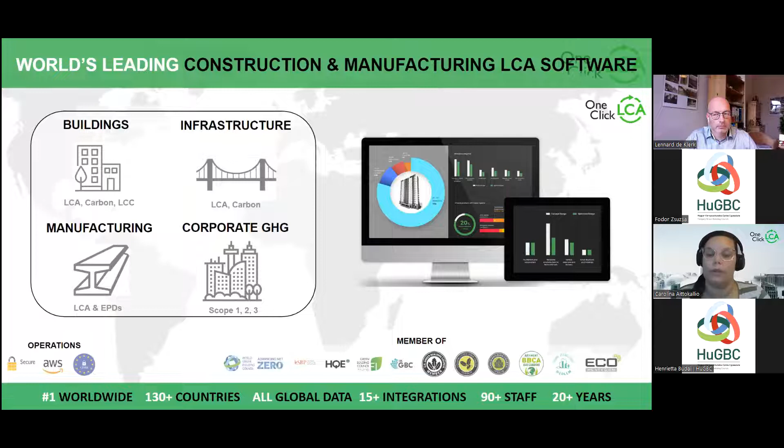We are able to connect the entire industry because we offer solutions for the entire industry. For example, manufacturers want to do the assessment on their products and issue environmental product declarations that will then be used and specified by architects and engineers, bought and used by builders, investors, and institutions in their calculations as well. In One Click LCA, we have solutions for each phase of the project, and we also need to keep in mind that the potential for decarbonization of the project halves as each stage of the project moves forward.

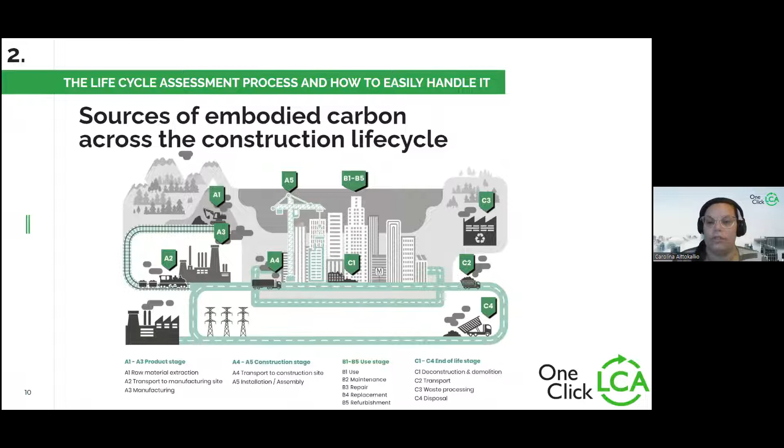However, we have some more stages that we need to take into consideration if we are going to be working with European norm standards. So, for example, in the B stage, we have the operational energy and water use, and we also have the D module that talks about benefits and loads beyond the system boundary. So in terms of life cycle assessment, this is how it is done with this breakdown of stages.

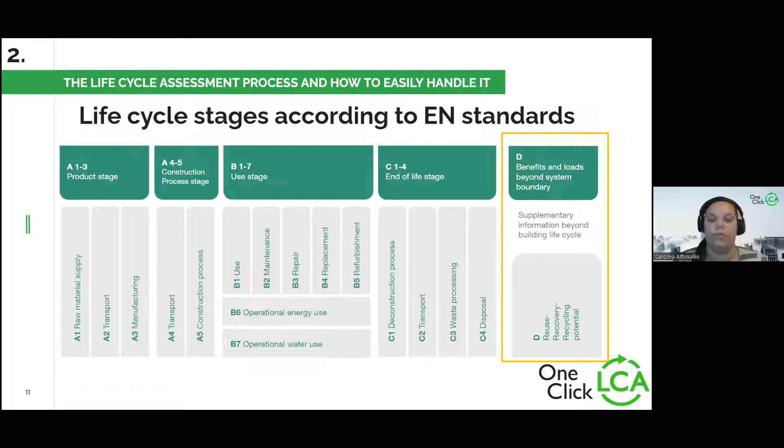And in terms of whole life carbon, the difference of whole life carbon is that it considers other impact categories beyond just carbon and biogenic carbon. So it considers also acidification, eutrophication, ozone depletion, and others.

So what is building circularity? Building circularity is a way to measure the circularity of a building and a construction of a building. There is no norm in place for building circularity at the moment, but there are principles and metrics, and some of the most well-known and used are from the UK GBC, HQE Economie Circulaire from France, the London Planning Circularity Statement, and the Ellen MacArthur Foundation Circularity Indicators, which are very much intertwined.

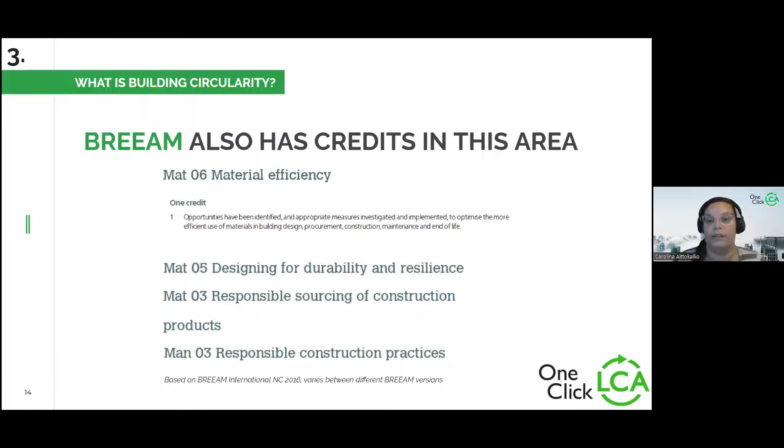So for these principles and metrics, what they consider are only the manufacturing stage and the end of life of the products of this building. Also in terms of certifications, BREEAM also considers credits for the circularity assessment. And within this consideration, we need to think about a few other elements. For example, the design in the buildings.

So is the design made for assembly, disassembly? Is it made for adaptability, flexibility, longevity? And also the reuse potential and the impact of the materials. And also if we are designing out waste, for example, using recycled materials.

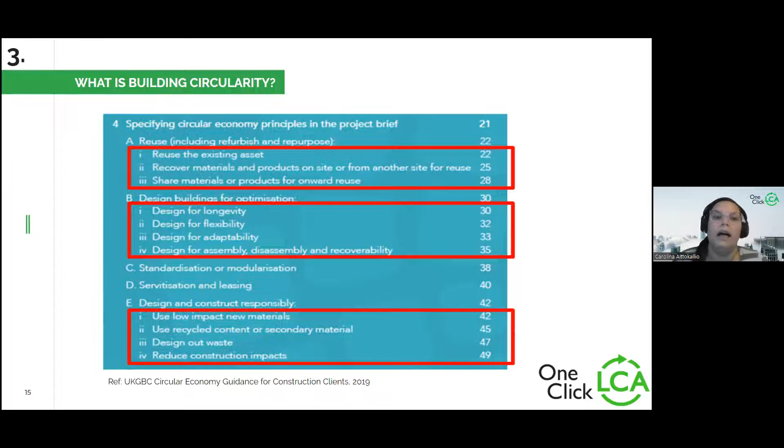And now just a quick question before we explain how the breakdown is made in terms of the impacts for building circularity. At the end of life, we have two different types of materials, the materials that are downcycled and the materials that can be used for energy. So how do you think those materials are accounted for, for circularity purposes?

Do you think materials that are downcycled and used for energy are fully accounted for, are only accounted for in 50%, or are not accounted for at all? Let's give you some time to give your opinion and vote.

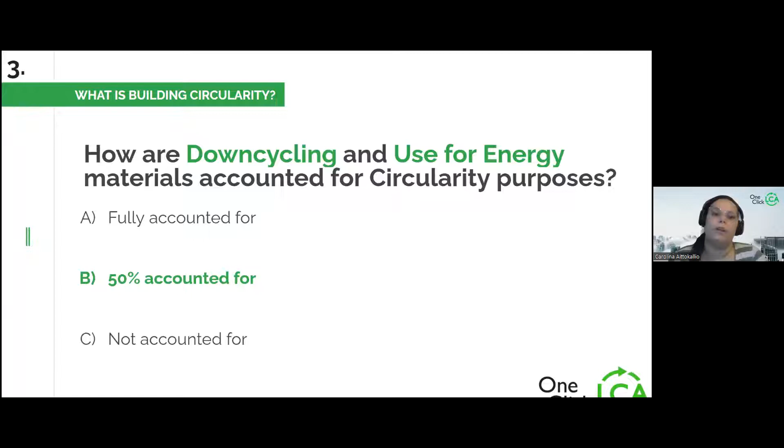Okay, so I guess we have here the majority of you, 46%, think that it's 50% accounted for. And you are correct, it is 50% accounted for. Let's have a look at how the circularity principles are used for circularity purposes. So we have here at the top of our circularity assessment, the materials recovered, in which we can find all the materials that are used in the construction of the building.

So here we have virgin materials, renewable materials, recycled materials, and reused materials. And for circularity purposes, virgin materials are not considered at all, but all the other materials are fully considered. So the sum of materials recovered here is 4.1% from the renewable, recycled, and reused materials.

At the bottom, on the other hand, we have the materials returned, which are materials that come from the deconstruction process of the building after the life cycle has happened. So here we have the use as material, which is fully accounted because it's a material that is used as the same quality, same type of material. Then we have recycled materials that are also fully accounted for.

We have downcycling and use as energy materials that are accounted for in 50%, as you guys now know. And the disposal materials that are not accounted at all. So the sum of those materials are the materials returned, and our circularity score is the calculation of the average between the materials returned and the materials recovered.

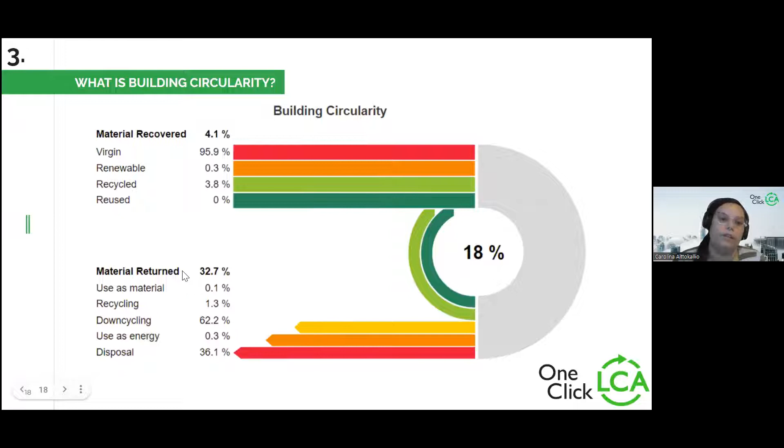So how do we apply building circularity to buildings? We have some principles that we can work with. For example, we can combine it with other life cycle assessment or life cycle costing calculations. We have to be aware of the weighting principles, which are mass-based, and the calculations are mass-based, and the weighting principles are the ones that we just discussed on the last slide. And we have to also understand the scope of the calculation that considers all the materials in the period given, including site wastage, replacements, and end of life.

And what does it cover? It covers the reduce, reuse, recycle principle, value preservation, design for adaptability, and design for disassembly practices. The users of One Click LCA that use this tool, the building circularity, what do they need to know to do this assessment? Basically, the materials and their quantities, and also refine from the default values the percentage of reused or recycled materials, the shares of waste, and also if they are made for design for disassembly and adaptability, if that's the case. The calculation percentage, once again, is 100% linear, taking into consideration the weighting principles.

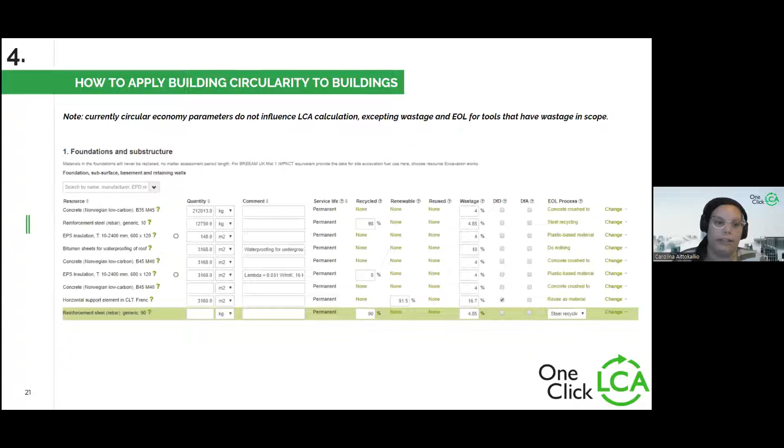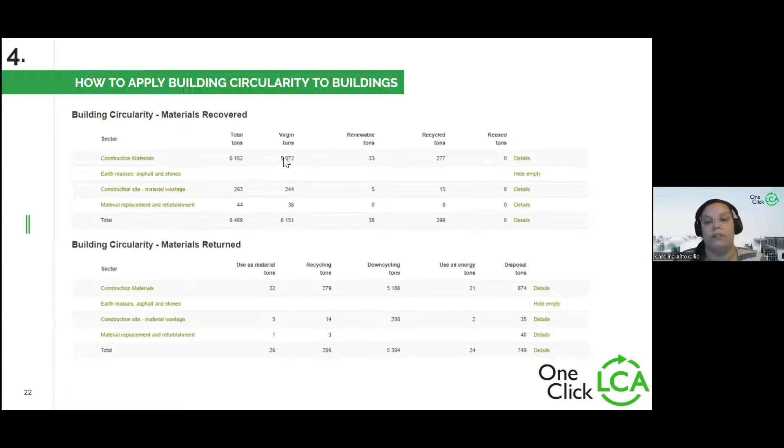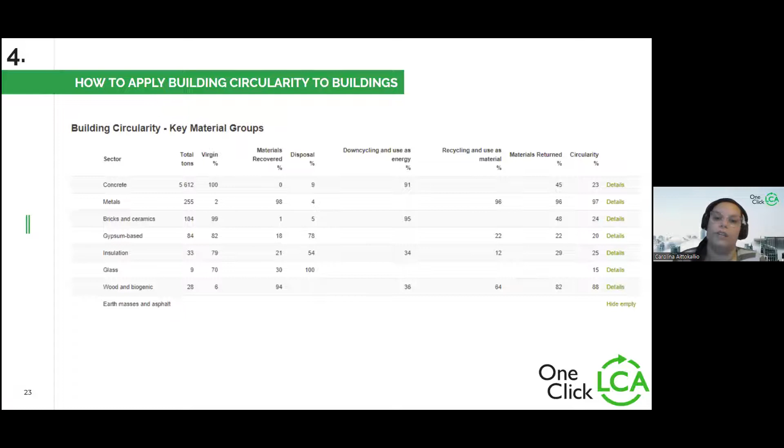Then in terms of results, we can have results for materials recovered and materials returned, not only in the graphs, but also in numeric terms. So here we see them in tons. And also we can see the key material groups, the materials that are the most responsible for the circularity score, and how so. For example, here we have concrete with a very high amount in downcycling and use for energy. And now let's have a look at how to work with building circularity with the help of One Click LCA.

So here I have a project in which we have our levels lifecycle carbon tool, and we have our building circularity tool. We have two projects, the baseline and the proposed design, and we can also compare the two projects down here. If I click on my circularity score from the building circularity, I can see the data input tabs: the building materials, the circularity weighting factors, and the calculation period. In the building materials, we will see what I just showed. So here we have the foundations and substructure.

We can input those materials either manually by typing or clicking the arrow, or we can also import from one of our more than 15 different types of integrations. Then we need to input quantities, percentage of recycled and so on. If we import from other sources, we don't have to input all of it. Usually the type of material, the name of material, quantity, and quantity type are already present in the import. We then have the circularity score and weighting factors displayed here, as we mentioned before. This can also be altered if you're working with different principles for circularity. And we have the calculation period, which here is 60 years for this project.

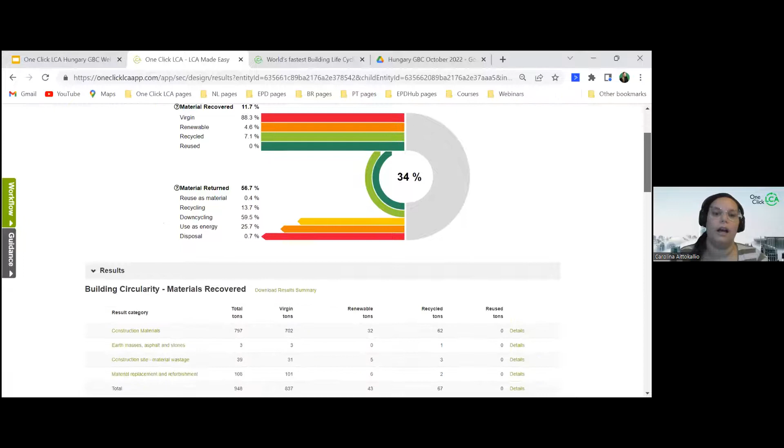Then we can have a look at the results. In the results, we have our graph that we just had a look at. We also have the results that we saw earlier. And we have here a list of materials that I have selected for design for disassembly and adaptability practices. We also have different types of graphs that can illustrate these results: our basic graphs here, and then our advanced graphs, so bubble, Sankey diagram, tree map, life cycle stages, and so on. Let's go back to our presentation.

And what other tools can we use with building circularity? We can use the levels tool, which is the one I used for the project I just showed. We can use Carbon Designer 3D, which is an early stage tool, the lifecycle costing tool, LCC, also BREEAM, as I mentioned before, and also our net zero carbon tool can be used in connection with the building circularity tool.

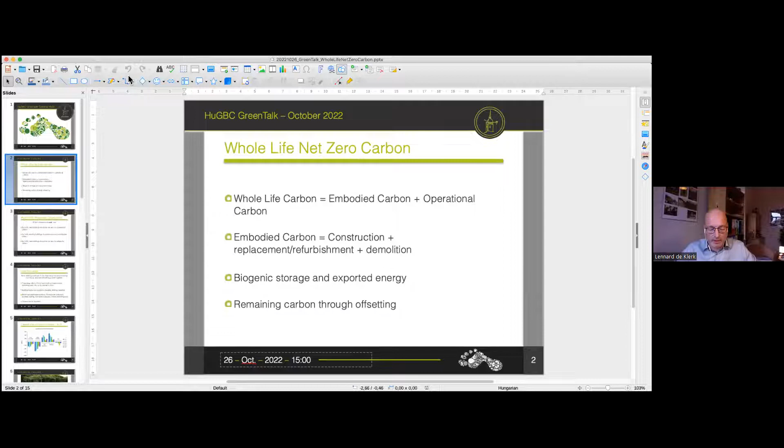And yes, indeed, what I would like to do in this presentation is show you a real life example. And this is all because we are working on whole life net zero carbon. And just to remind everyone what we're talking about: we're talking about the total carbon emissions over the full life cycle, the whole lifespan of a building. So that's what we call whole life carbon. And that consists of two elements. One is embodied carbon, and embodied carbon is defined as the carbon emissions due to the construction of the building, the replacement and refurbishment during use, and at the end of the lifetime, the demolition. Whereas operational carbon is the carbon emitted for using the building as such. So you should think about heating emissions or the usage of electricity while using the building.

Other elements, and I will talk about it soon, are biogenic storage, exporting energy if you produce more electricity, for example, than you consume. And if you have any carbon emissions remaining, you might offset them through projects.

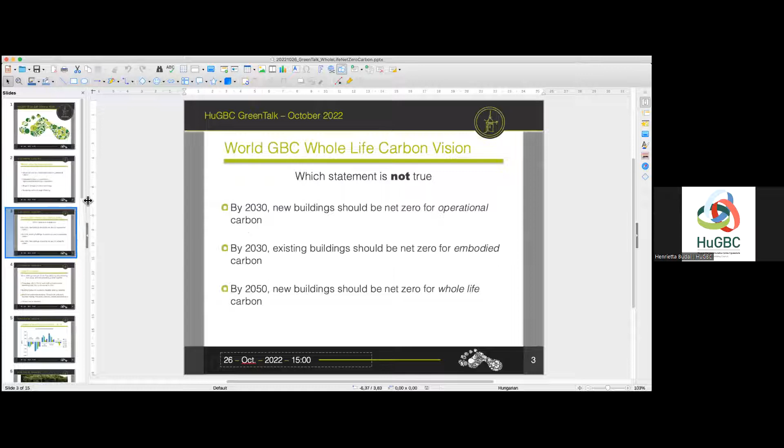The second answer got a score of 71%, and the first and the third one got 14% of the answers. Okay, that's very good, because indeed the second statement is incorrect, and I'll explain why. If you want to have net zero embodied carbon, you would always be talking about new buildings. If a building already exists, you cannot make it net zero as far as embodied carbon is concerned. So the first statement is really to encourage people to be operational net zero carbon by 2030, and then by 2050, as the whole of Europe should be net zero carbon, it also means that all the buildings should be whole life carbon net zero.

So going to the presentation, Irota Ecolodge is a small holiday resort in the north of Hungary. We are between Miskolc and Košice in the Slovak Republic. And I'm also happy that I've been told that a lot of people from the Slovak Republic have joined this GreenTalk. So be welcome.

And what we wanted to achieve when we started this project in 2015, so that's already seven years ago, was to show the hospitality industry that luxury and sustainability go well together. Whereas sustainability is often associated with a simple life, we wanted to show that both elements, luxury and sustainability, perfectly go together. It consists of three large villas, 170 square meters each, which can house six persons per villa. And it has a shared natural swimming pool, which is 6 by 16 meters. We opened in 2016. And when we designed these three villas, we wanted to be as sustainable as possible.

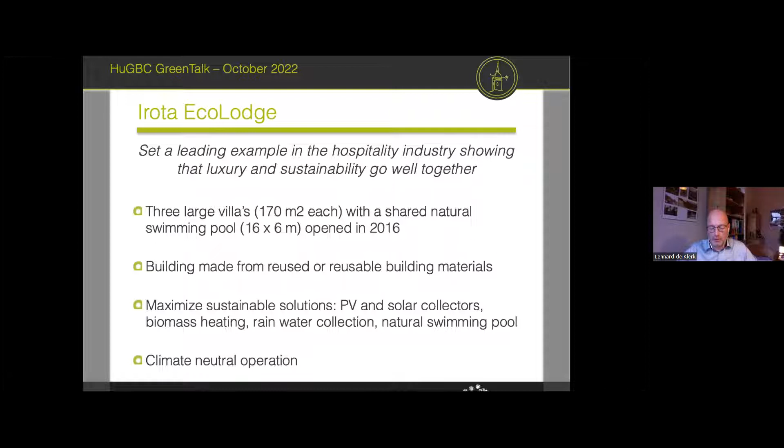The heating is with biomass, with firewood. We collect rainwater for flushing toilets. And the swimming pool itself is natural, so we're not using any chemicals here. And what we wanted to achieve is a climate neutral operation. And that's actually what you can see in here. These are our operational emissions, also better known as scope 1 and scope 2.

And here it's important to realize this is not only the building, the holiday resort itself, but it includes the full operation of our business. So you see first Irota EcoLodge itself, but we also have a utility building where we're doing the laundry. We're renting out an apartment in Budapest as well, the Budapest City apartment. And on the 4th, transport, these are our company cars that are using fossil fuel. And as of recently, we also have an electric car.

Anyway, if you look at the net emissions, they're below 0. So here we can claim that we are a carbon neutral operating holiday resort. But actually what we did want to have a look at is what have been our embodied emissions when we built Irota EcoLodge. And if we look at the whole life cycle, are we still net zero as well?

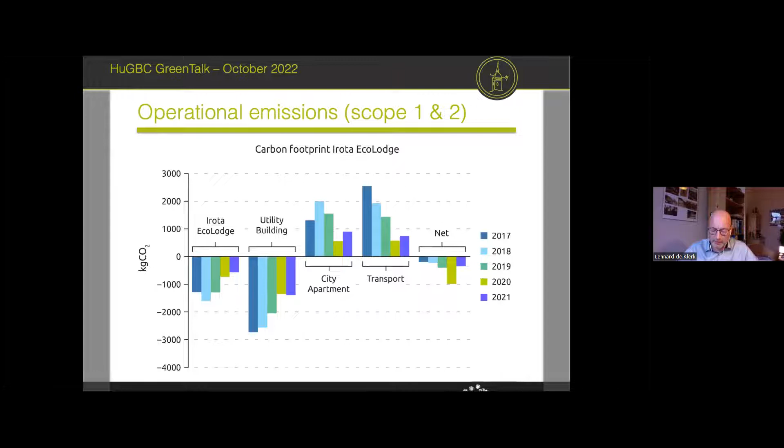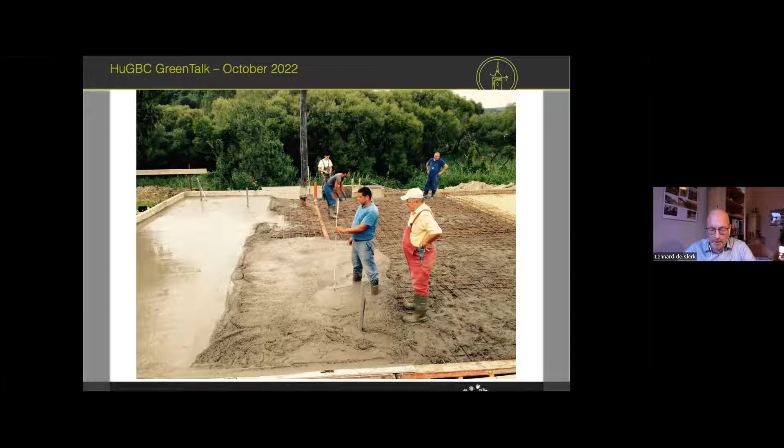But what we built on top of the foundation is different. And here you can see the reused or reusable building materials. On the left side, you see the timber frame construction, and wood is a perfectly reusable building material that at the end of the life cycle you can disassemble and use the wooden beams for other buildings. On the right side, you see cellulose, which is a building material made from newspapers, impregnated with a fire retarding agent. And with this cellulose, we insulated the floor, the roof, and also all of the walls.

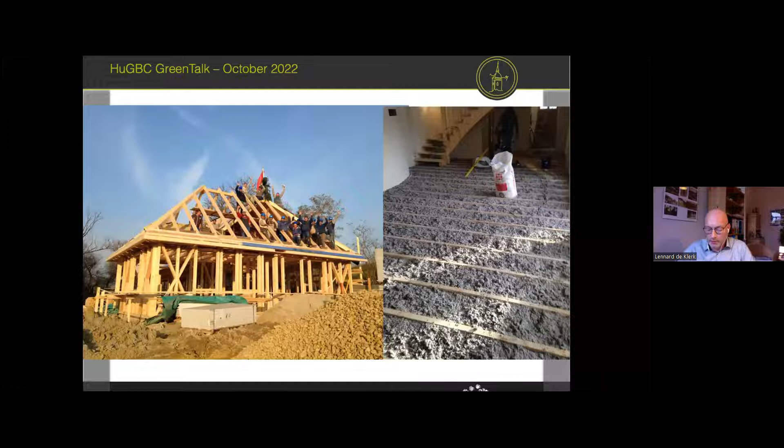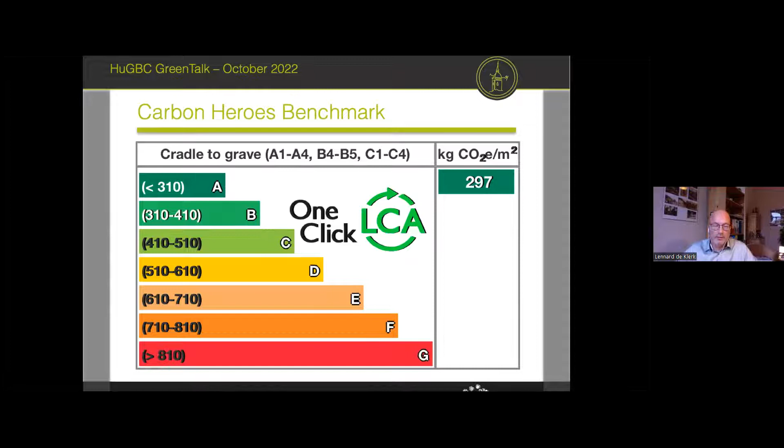And here you can see the result. The embodied carbon of this building is almost 300 kilos of CO2 equivalent per square meter. And if you benchmark that against average buildings in Central and Eastern Europe, you can see that we are in the A category. And that's not so much because of the foundation, because that's fairly standard, but because what we built on top of the foundation is relatively low carbon.

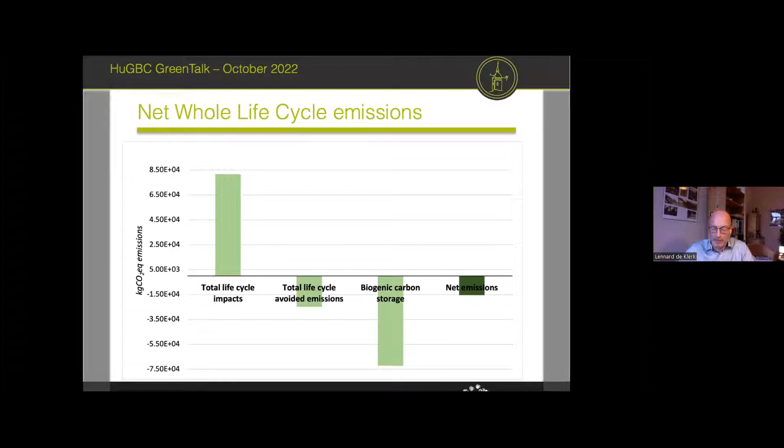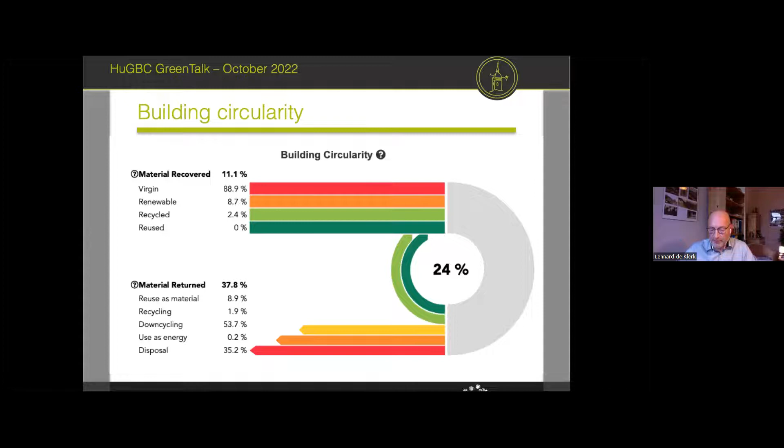And also, if you look to the materials returned, you see also a relatively high percentage of disposal and downcycling. Again, for the same reason, concrete is fairly difficult to recycle or to reuse in a circular economy. Anyway, the number looks small, 24%, but Carolina told me that within this metric, actually, it's a fairly high number. But I hope maybe that she can confirm that later as well.

So I have at the end of my presentation basically 4 takeaways. If you want to reach net zero whole life carbon, I think you should focus on the 4 following points. Foundations: you cannot avoid cement and steel, but at least if you use steel, make sure it's recycled steel. And if you use cement, try to find as low carbon a type as possible. Nowadays, more low carbon cement is becoming available on the market.

Everything above the foundation, everything above ground, use bio-based building materials as much as possible. And thirdly, an important element is that you design for disassembly. So make sure that the building you are designing can be disassembled at the end of life, so that particularly the bio-based building materials you can reuse for other buildings.

If you do this and you still have remaining carbon that you need to compensate, rather have an oversized photovoltaic system and try to avoid offsets. Offsets is, for example, planting trees somewhere else to sequestrate carbon. But if you can avoid this kind of offsetting, do it through an oversized PV system.

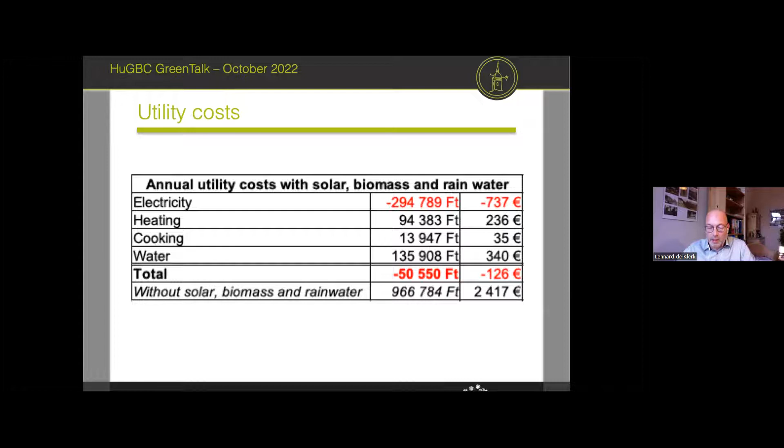So this brings me to the end of my presentation. There are some previous webinars on carbon footprinting and electric driving. Also through the Green Building Council, we did a green walk, so you can also walk through the different buildings and have a look at the pool. And the carbon footprint report, which I showed you on the first slide, can also be downloaded from our website.